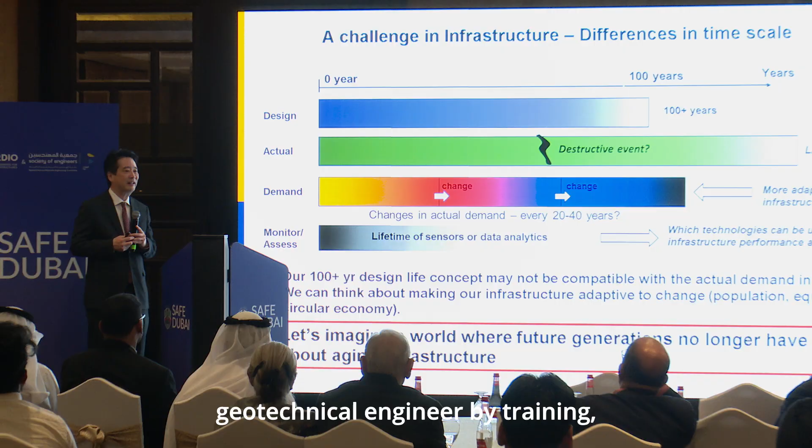So the talk of today is really about management, monitoring to management. So if you look at our infrastructure, as I'm a civil engineer, geotechnical engineer by training, we tend to design for 100 years, as you see over here. And then if you see the second column, if you're working in infrastructure, you want to prolong the life of infrastructure. Most of the projects I was involved in when I was at Cambridge University were in London, where we

have old infrastructure. Now I moved to the San Francisco Bay Area. We also have a lot of infrastructure, and we're struggling with those. I'm sure Dubai is expanding right now, but maybe in 50 years, 100 years, you may start to see those that we're working on. And we don't want you to see something that we're suffering. So what can we do better? And then we see a demand.

Dubai, when I came here 20 years ago, was totally different. And then I'm sure 20 years from now, it's going to be different. So the demand changes more rapidly than our design life, or actually the life of the infrastructure. So how can we make our infrastructure design not rigid, but more adaptive to change? So that allows us to think we've got to sense what we're doing, what the performance of our infrastructure is. And that leads to excitement in terms of sensors and data analytics that we see.

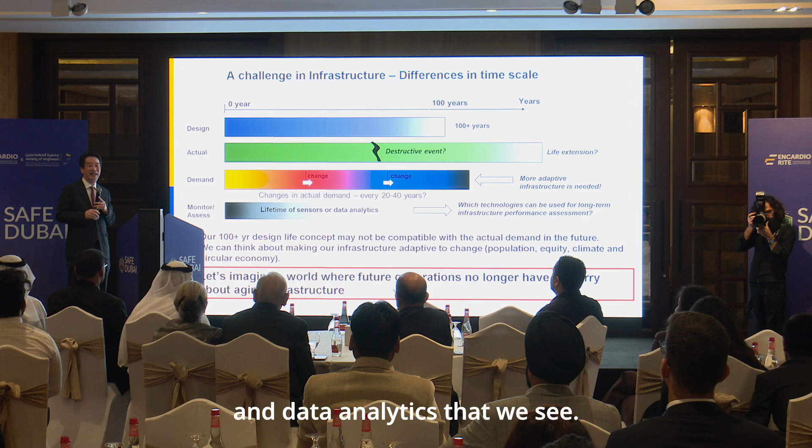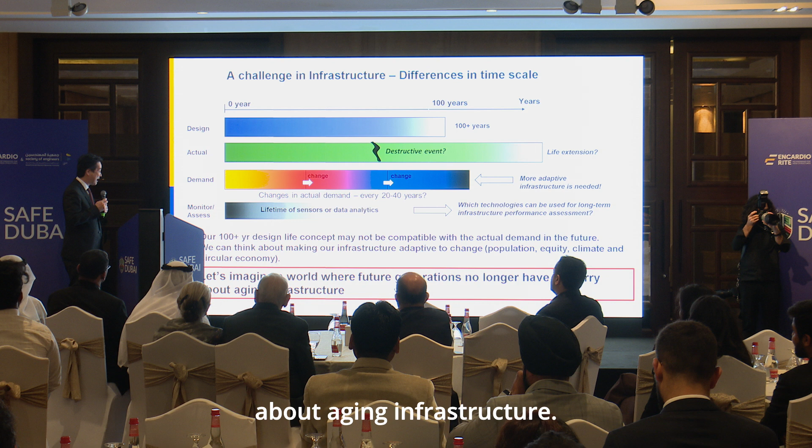But we want to make sure that these sensors, data analytics, will last for 20 years, 30 years, 50 years. What kind of technologies can we make sure are going to last for many years? So the point is that our 100 years design life may not be compatible with the actual demand in the future. We can think about our infrastructure as adaptive to change rather than rigid in terms of design and construction. So let's imagine a world where future generations like Ritvik and other colleagues do not have to worry about aging infrastructure. So that is the spirit that I want to give you today.

So first, excitement. Excitement is about the technology, emerging technologies. That's what we see over here in Dubai as well. This particular graph I made about 3 years ago, and I'm sure it's changing now, but vertical axis, expectation, horizontal axis, time, and there's always a hype that goes up to the peak, and you can see AI, machine learning, a little bit going down maybe, but then there's a peak, and it goes down to bring it to the market. You see LiDAR, wireless sensor networks, drones.

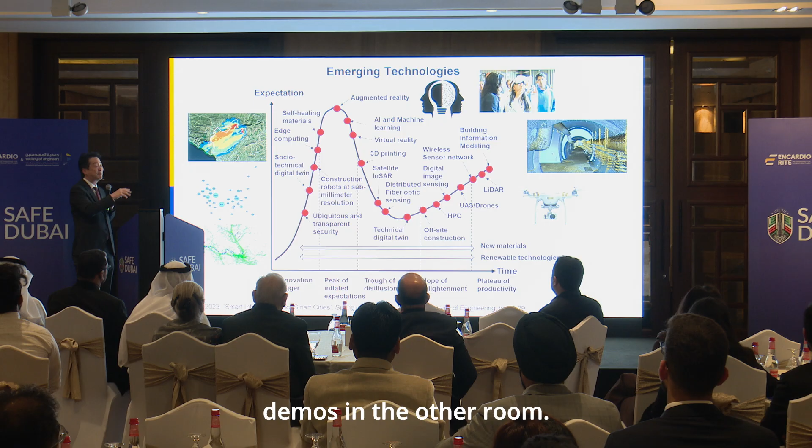I see some of the demos in the other room. You see this happening in real environment right now. You see technical digital twin coming in, and this is part of the theme I think we're going to have today, but also distributed fiber optic sensing, which I'm going to talk about a little bit more as well. And satellite systems. Sorry, it doesn't work here. And then you have machine learning.

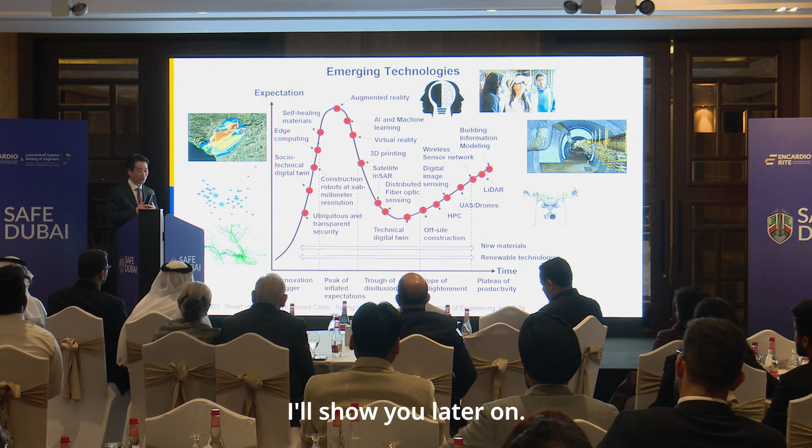And then the other thing I want to talk a little bit about is technical digital twin, but we call it socio-technical digital twin. How we bring social science into digital twin. And this is something I'll show you later on. Distributed means a lot of things. Distributed in space, from satellites, drones to sensors, and we go across different things. What excitement.

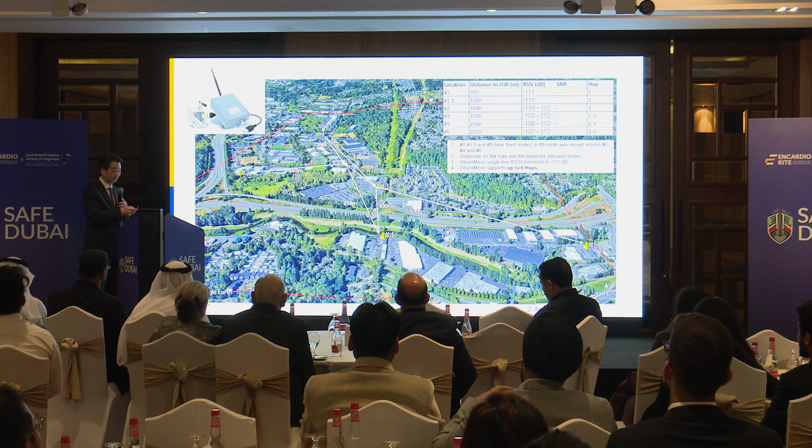This is one of the technologies 20 years ago, one of my PhD students spun out to create a wireless sensor company. And Amit said that he's using the sensors right now in Dubai, so I'm so happy to see that. What it allows you to do is you can monitor things. These are the nodes that can talk to each other and hop, hop, hop like what you do with your Wi-Fi at home mesh network, but on a really large scale. It allows you to move and distribute in time. You can measure in different time intervals.

For example, you can have a low data sampling rate, maybe one sample every hour. And then if you use these batteries, theoretically it can last for 20 to 25 years. So you just leave it and then you can monitor for 20 to 25 years. Because in most cases, it's not the device; the person changing the battery is the most expensive part.

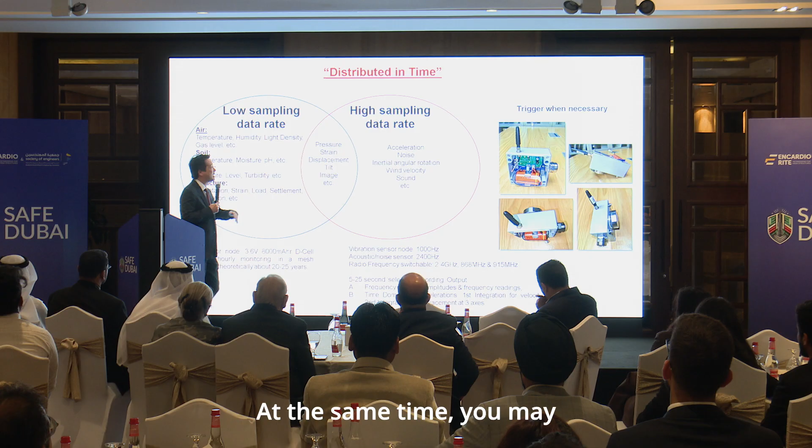At the same time, you may want to measure acceleration or some noise that has a high frequency. In that case, the battery cannot do very well. So you can start to think a little bit cleverly in terms of triggering when necessary. These are triggering devices that you see, and then you save energy. But the point is, for the past 20 years, we spent a lot of time asking how we can make it low power so that it can last for a long time. So that's exciting.

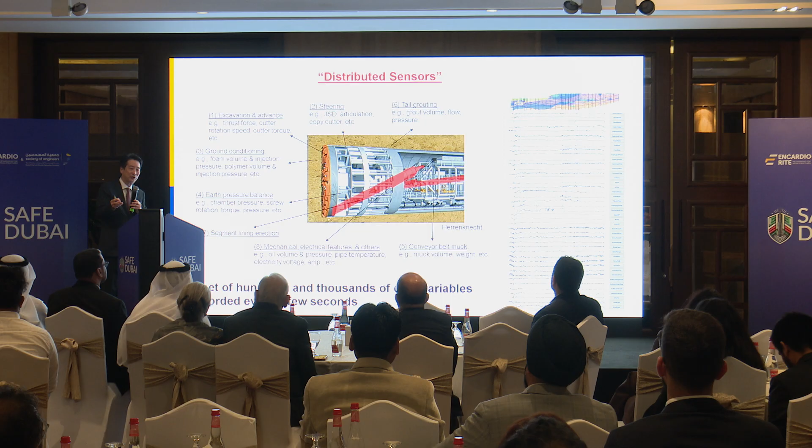And we can start using those to understand what's in front of you, like automated cars, which use LiDAR and visuals to find out where you want to go. But in tunneling, you cannot see in front, but you can use the information to see what ground it's excavating. At every borehole you have a ground truth, and as you move, you start to see what's the ground in between the boreholes.

And you can see the blue is clay soil, the orange is sandy soils, and this is what the AI or data analytics will tell us from 6,000 data sets as you learn along here. The one over the top shows what the engineering geologist tried to interpolate between the boreholes. And what you see is such a nice correspondence.

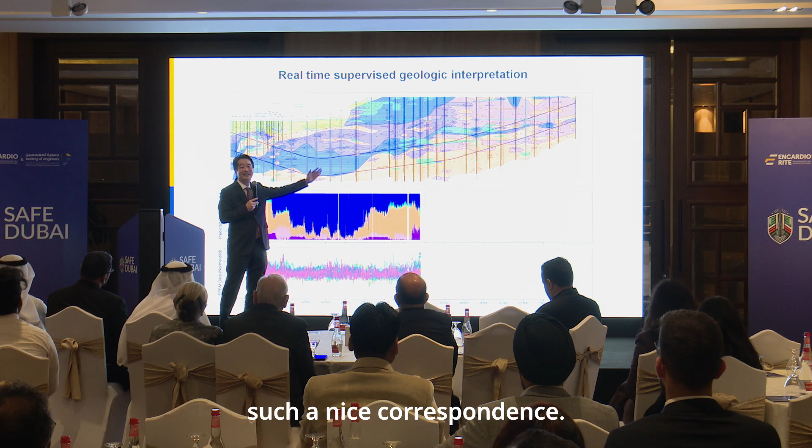If you look at the details, for example, you can see some pockets of different soils in green or purple, and you can actually see that through the machine learning technique, through the 6,000 data sets. So that's exciting as well.

So at UC Berkeley, we have a Center for Smart Infrastructure. It's really about partnership with infrastructure owners, academia, industry, and regulators to address the most pressing challenges like aging infrastructure, climate change, water supply, natural resources, and emergency and community preparedness. Especially in the Bay Area, we have earthquakes and wildfires, which I'll show you more later on.

But the vision is to provide innovative solutions to realize adaptive systems with intelligence for life, making sure that we monitor our infrastructure until it is reused, for example. So we work together with many infrastructure owners, because they tend to have a very long-term view, and therefore, if we work together, we will make it happen.

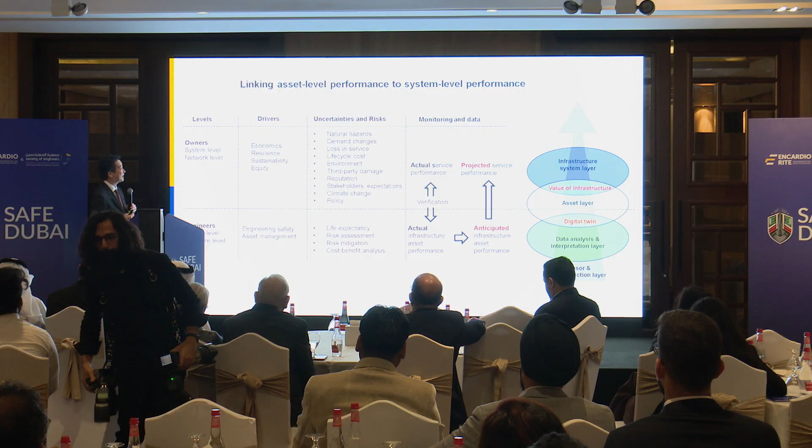One thing we also want to do is look at how data is used to interpret your asset through the digital twin, and really the value of infrastructure. And we have to appreciate, and this is where I work with many general managers of infrastructure owners, what are they thinking about? What are their drivers for economics, resilience, sustainability, equity, for example? And there are a lot of uncertainties, like reputation, policy, and stakeholders' expectations.

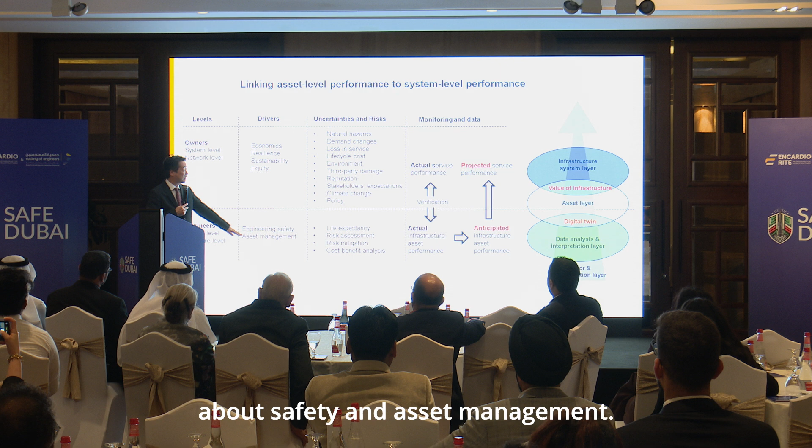Engineers like me are really looking at the asset level: safety and asset management, life expectancy, risk assessment, risk mitigation, and cost-benefit analysis. Our job is really to link this through monitoring. But monitoring is not just to see what's going on right now. What we want is to predict what's going to happen in the future, which gives a projected service performance and allows infrastructure owners to cope with sudden things they never thought of, so they're ready to act.

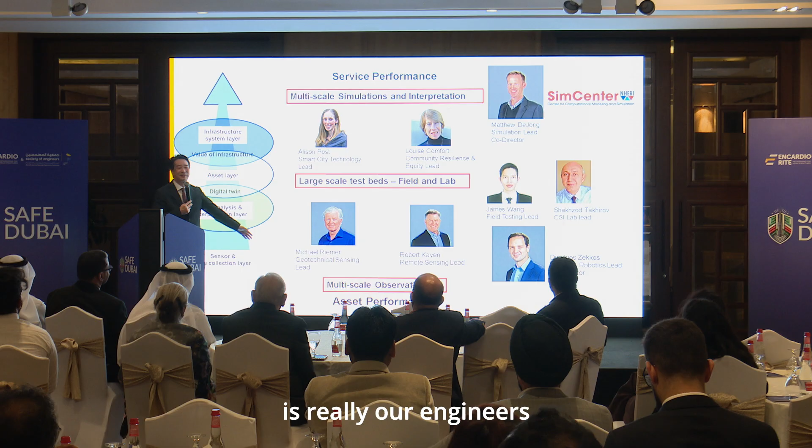So at UC Berkeley, we have a lot of people working on it. At the service performance level, we have the Sim Center, a simulation center, which I'll show you a little more later on. My colleagues on the top are social scientists, whereas on the bottom are our engineers looking at assets, all linked together through large-scale test beds, showcasing that we can do it.

And hopefully what we want to do is to have this circular economy. That infrastructure is built, you operate, hopefully extend the life. And that's what we want to do. We want to live longer. But then think about rebuild and how can we use this data to make this happen.

So what I'm trying to do next is to give you some examples. So this is just a vision, and what I'm going to show you is some of the examples. Smart construction. I'm happy to see a lot of things happening as a geotechnical engineer. It's a dream to be here in Dubai. A lot of piling, foundation, and all these things.

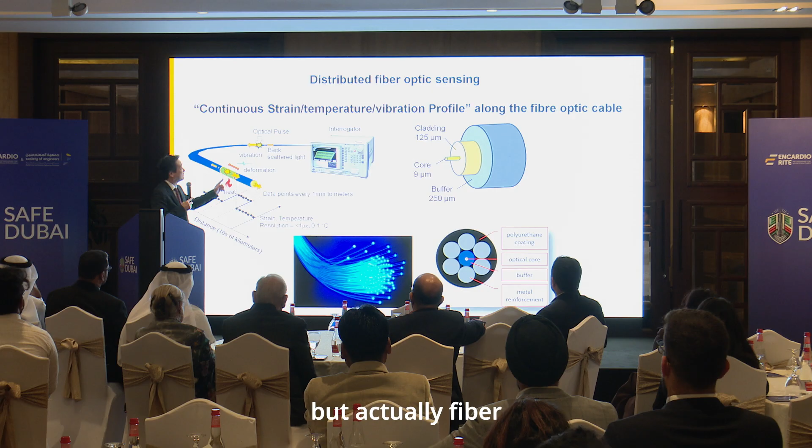And one of the technologies that we've been using for the past 20 years is what we call distributed fiber optic sensing. It's a fiber optics. Maybe some of you have heard of it. Fiber optics, mostly used for telecommunication, for fiber optics communication, but actually fiber optic can become a sensor. You shoot a light, and then every point, a small light comes back.

And if you analyze that small light coming back at different locations, I can get what is the temperature at that point, what is the strain at that point, what is the vibration happening at that time, at every point along the fiber for tens of kilometers. So think about using this as a sensor for monitoring infrastructure. And this is called distributed fiber optic sensing.

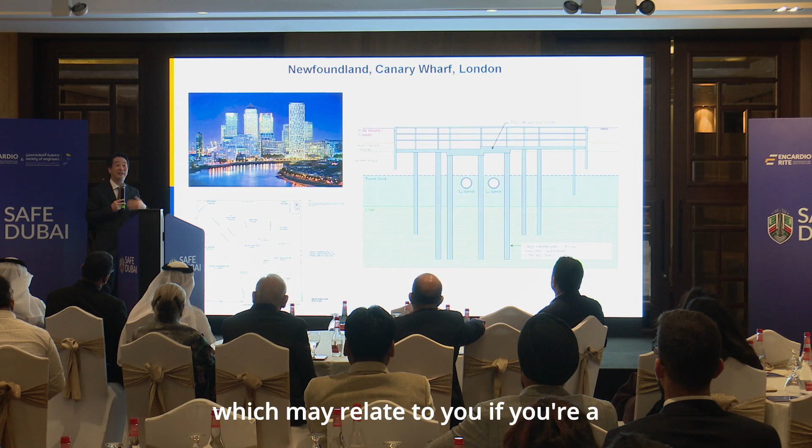So I'm going to give you one example as a geotechnical engineer which may relate to you if you're a geotechnical engineer. This is a project in London, in Canary Wharf. There are buildings, as you can see, it's one of the financial districts in London. There are not many high-rise buildings like what you have over here in Dubai, but there are a lot of issues on ground. So typically here, you have a London Underground tunnel, old infrastructure, with the new piling going nearby.

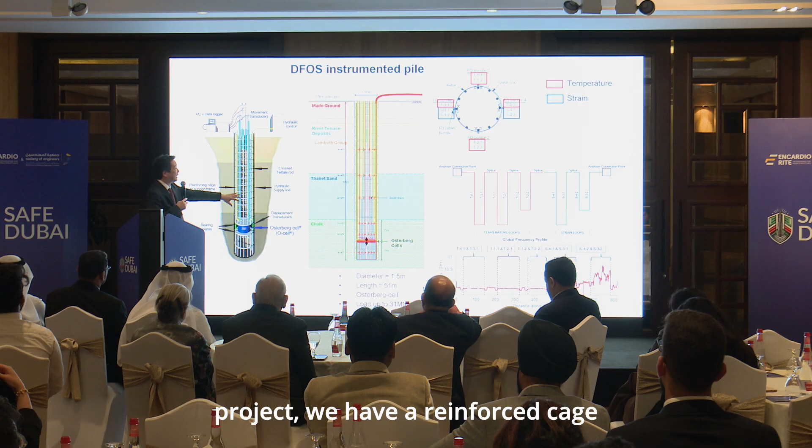So it's very important to understand what is the pile-soil interaction. And this is a pile of about 50 meters or so, and I'm sure in here you have that kind of shaft and piles, large diameter piles. So in this particular project, we have a reinforced cage where we attach the optical fiber during construction. There are two cables attached. One is a strain cable, and the other is a temperature cable.

And we attach the cable at different locations on the cage, so the cable goes in and out to the surface, goes to a different location, goes to the pile, and comes up at different locations of the pile in terms of temperature and strain. And the cables are connected together, and once you have this interrogator, I can get the temperature and strain at the same time during the loading.

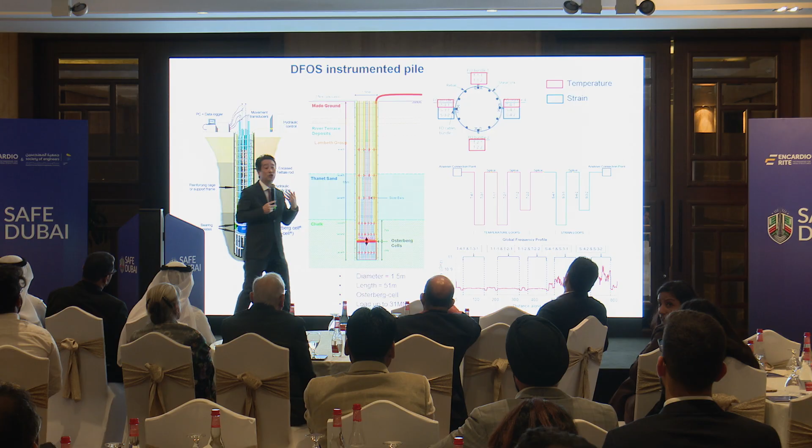So this is the pile load test, the bidirectional loading test, or we call it O-cells, that we measure. We have an expert here. We have an O-cell that pushes the pile upwards but pushes downwards. It's a self-reacting device, which is so good because if you just apply a load from the top, you need to have a huge reaction, whereas this is self-reaction. But it allows us to understand what is the shaft friction, meaning the friction between the pile and the soil, and then what is the end bearing of the pile.

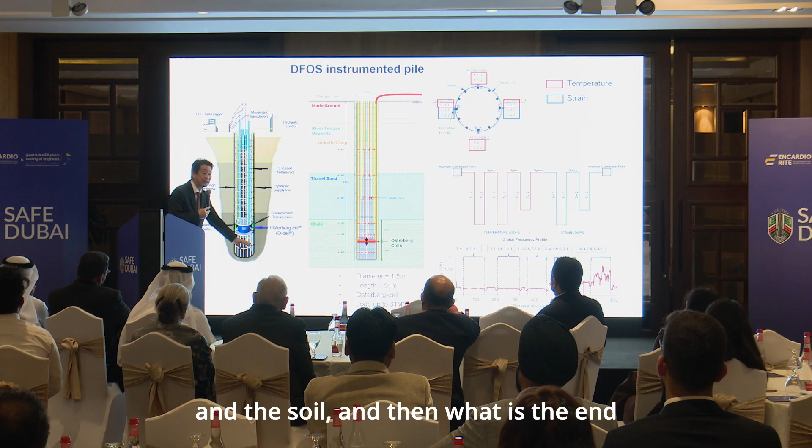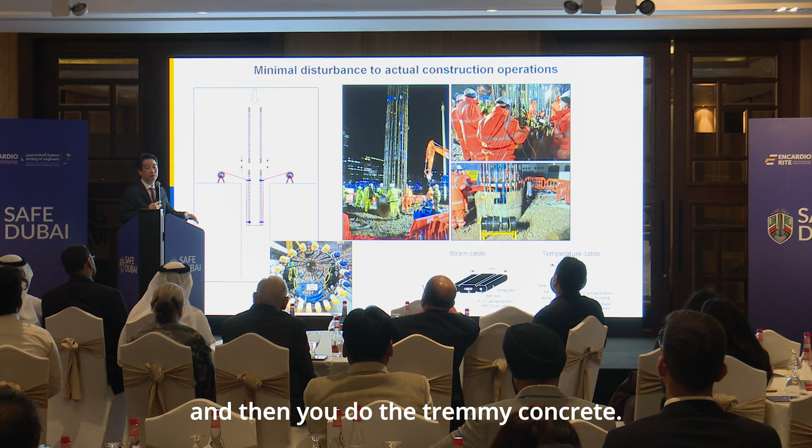It is important to make sure that these are installed in a good way, but also don't disturb the construction process. So this one, you can see the drum of cables that goes in as the cage goes down. Our contractors just attach the cable, hook it up, and then as it goes down and when cages are spliced, you hook it up. And at the end, you pull it a little bit, and then you do the tremie concreting.

One thing that we always worry about is how the concrete is flowing when you do the concreting. So sometimes if the concrete doesn't flow well in the ground, you may have some pockets without concrete. So what we tend to do is what we call a thermal integrity test. Because the cable can measure temperature, I can see how the temperature is changing during the curing of the pile.

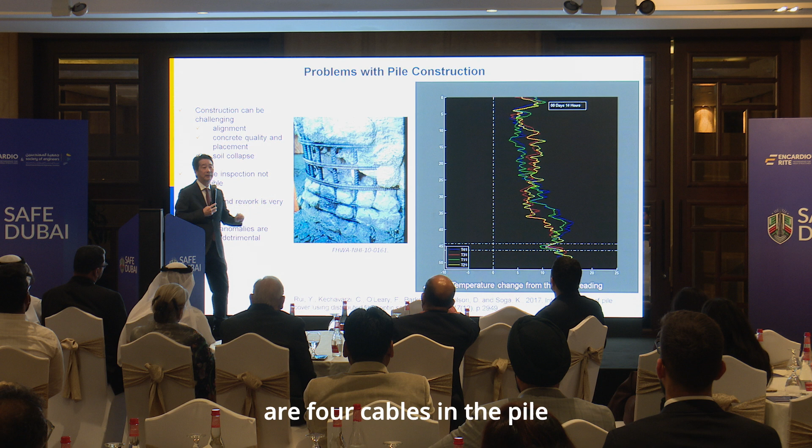And this one shows there are 4 cables in the pile at 4 different locations, 90 degrees apart. And you can see that they're curing in a different way. As you can see, the blue and green are on one side, and the red and yellow are on the other side, meaning that curing is not happening uniformly.

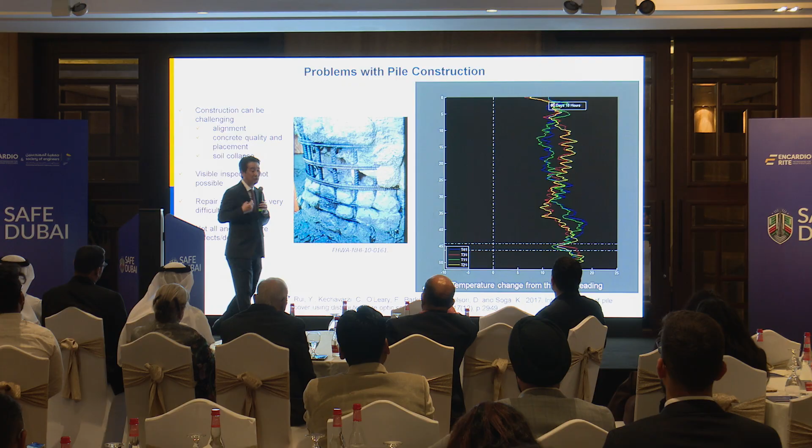Also what you see, I'm going to do it again, is this sort of randomness in the data, but also ups and downs in the data, in a sense that every 3 meters or so, there's something going on in terms of temperature variation during the curing. But what we can use is how the heat is dissipating into the ground, and this is called thermal integrity testing. Based on that, I can try to get a shape of the pile.

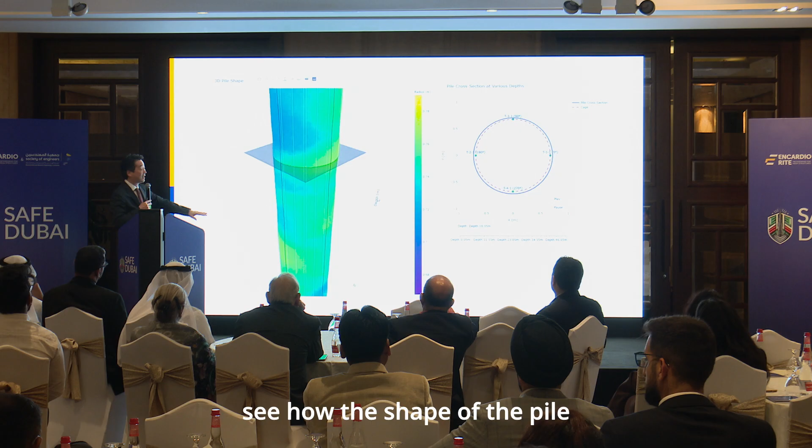So by looking at the temperature change with time and doing some analysis, I can get a shape of the pile. And this is called thermal integrity test. So this is the shape of the pile of this particular case. And then what you can do is that you can start to go to a deeper one and just see how the shape of the pile looks like, just from measuring the temperature change. And you can say, wow, it looks good, maybe thin over here, thick over here. It's not a big variation, but you can see how it's performing.

Now you look at the pile, and now you apply a load. So you can apply a load. And now you're applying a load at the bottom. Your strain will be the largest at the bottom and then decreases as it goes to the top because you have friction happening between the soil and the pile. And then this particular gradient is related to shaft friction.

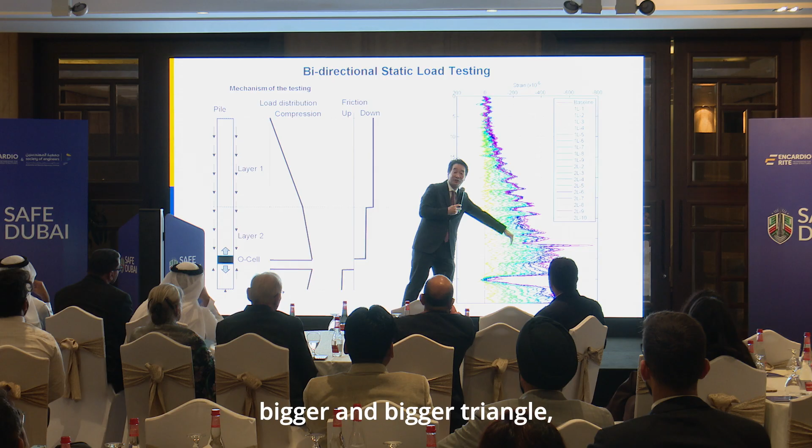And what you see over here is that as you increase the load, this triangular distribution becomes bigger and bigger. The triangle will become bigger, meaning that the gradient is higher, meaning that there's more friction. So when you look at this particular data, it looks like a triangular distribution, but it goes up and down. Do you like this data? Oh, that's good, because many designers say, I want this, not that.

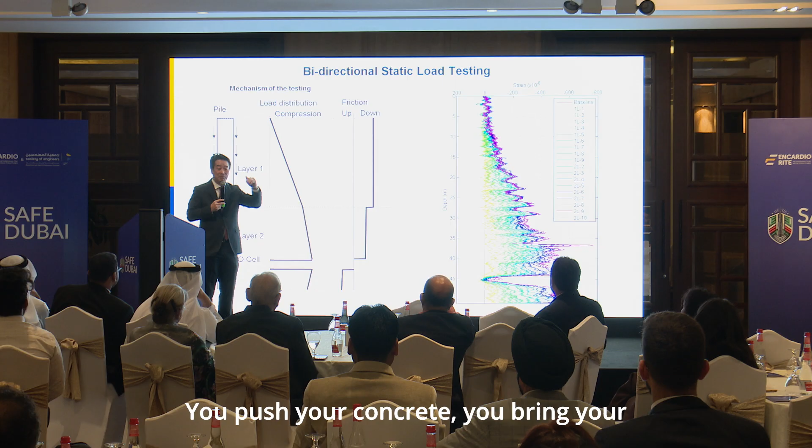But the point is that the data is not just one data point over here and one over here. It's lots of data creating the shape. And there's a lot of analysis we can do, but the point is that it's about a 3 meter interval. That is related to how you do the concrete. You push your concrete, you bring your tube up 3 meters, and then you push it again. There's an interesting cross-section process that you can do.

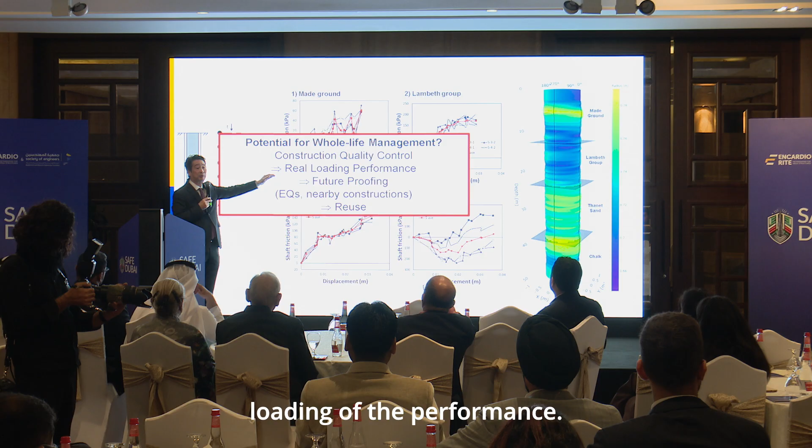But then with these data sets, you can do a finite element analysis to get how the shaft friction is developing with load. And these are called TZ relationships that we use in design. So you can derive the TZ relationship based on that. So this is the excitement: with fiber optics, you can measure the real performance as part of the construction control. You can see the real loading performance, and also future proofing.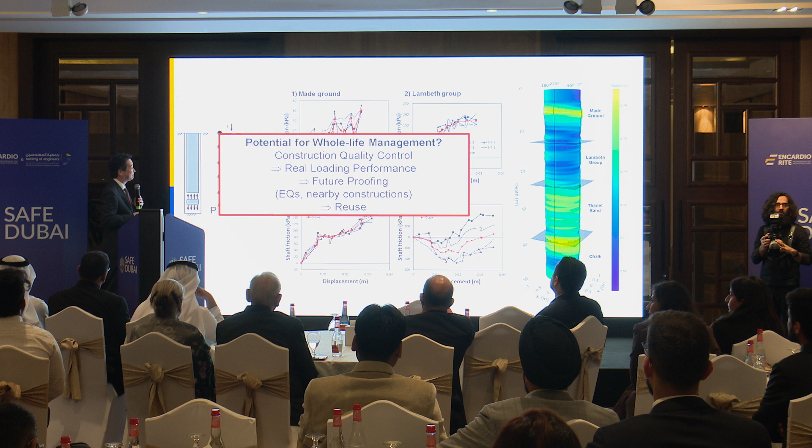Perhaps there will be a new construction nearby in the future. You have fiber optics already in your pile. So just hook it up, and then you see actually how the pile is performing. And once you know the real performance, maybe you can reuse the pile. And that's something that many people in geotechnical engineering have been thinking about. And as a developer, that will become a very important part of the asset. The foundation becomes an asset for future development. So that's just one of the examples of the excitement. Smart operation.

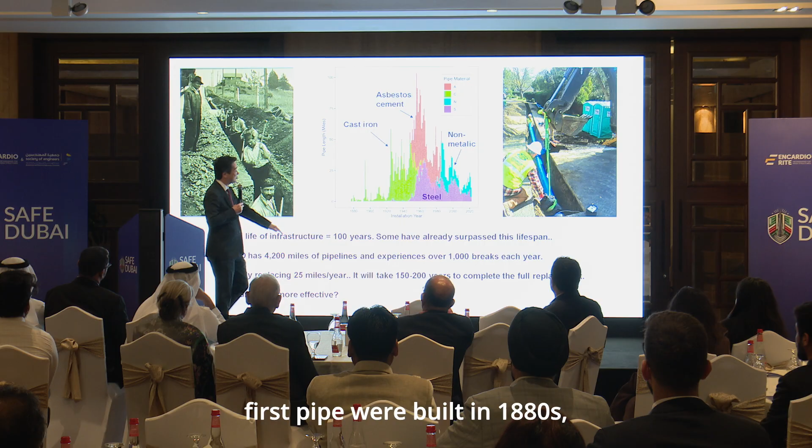This is the history, and you can see that the first pipes were built in the 1880s, 150 years ago. They used cast iron. Around World War II, after World War II, they decided to use asbestos cement pipe. And then after that, people started using steel pipe, and corrosion becomes an issue sometimes. And then you have non-metallic ones.

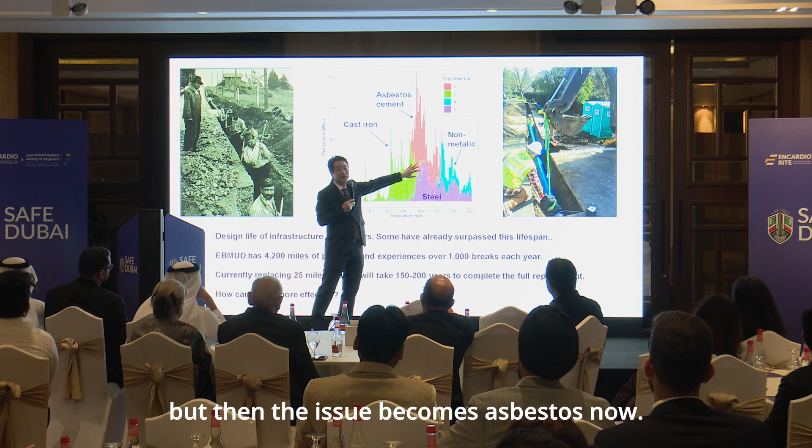The point here is that even with a 100-year design life, we tend to make decisions changing how we're going to use different materials. So that's a problem. We've been really focusing on cast iron, but now the issue becomes asbestos. We start to see some asbestos pipe, which is a very big issue because once it's exposed to the air, asbestos becomes particulate and a health issue. So we're thinking how we can rehabilitate these. But the point is that this infrastructure has a 100-year design life.

This particular company called East Bay Municipal Utility District, we call it East Bay MUD, has about 4,200 miles of pipelines. It goes from San Francisco to Chicago and back. That's the length of pipe they have. They replace about 25 miles, 40 kilometers, per year. Just thinking about the cycle, it's going to take 150 to 200 years. So it's beyond that 100-year design life. So how can we do better?

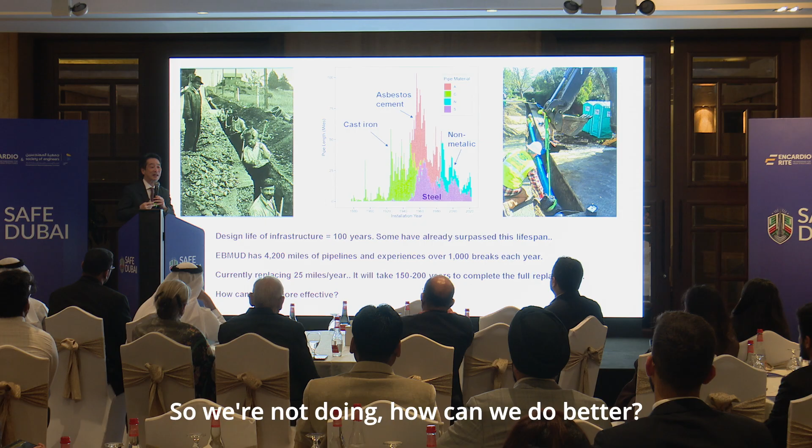So we look at these, and then we look at each pipeline and see what kind of strain. If I know the movements, I can back-calculate what kind of strain these pipes will experience, both in axial and bending.

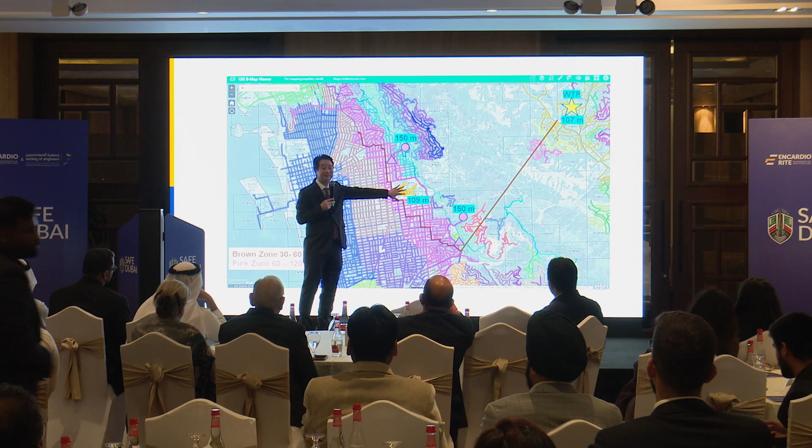This is the picture of the pipeline in our area. If you come to our campus, this is our campus. Our campus is in what we call the pink zone. And actually, this is a hill, the Berkeley hill. From the bay, it goes up the hill and to the other side. We have a water treatment plant on the other side of the hill, at an elevation of 107 meters. Our campus is at 109 meters.

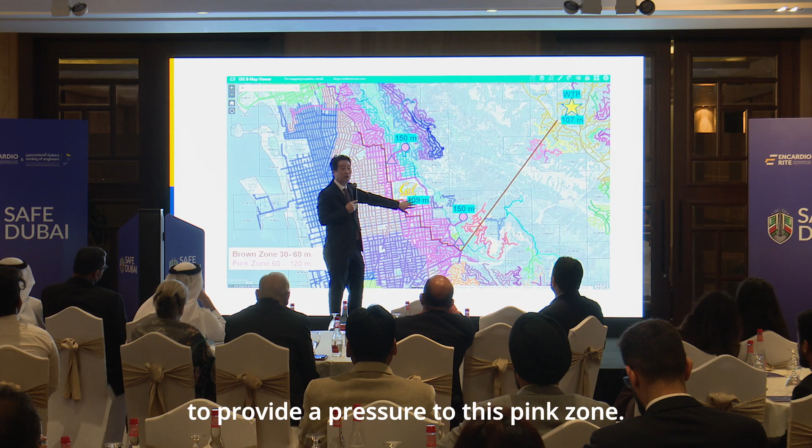So in order to have enough pressure, every day water goes through the tunnel and up to these two water reservoirs, tanks. That gives enough pressure, 150 meters, to supply this pink zone. And unfortunately, our fault goes right across here. So if an earthquake happens, we have a risk.

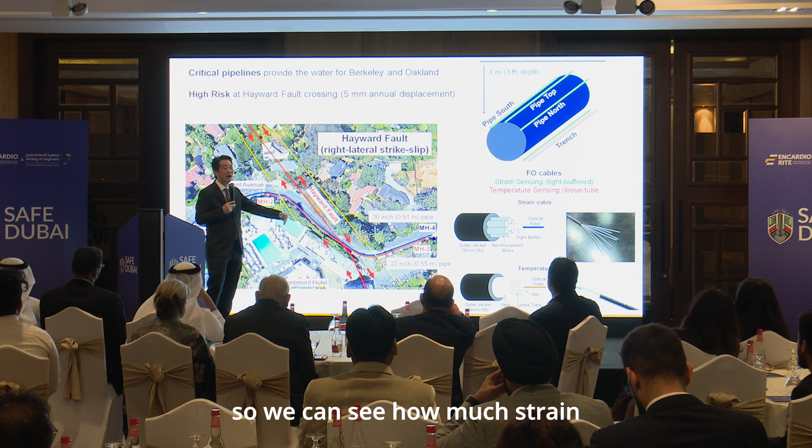So here we put fiber optics. This is a new pipeline crossing the Hayward fault, and we attach the optical fiber, like what you see over here. Some are in the trench, some are on the pipeline. You directly attach it to see how these pipes are behaving. And actually, this fault is creeping with time, so we can see how much strain is developing on these pipes.

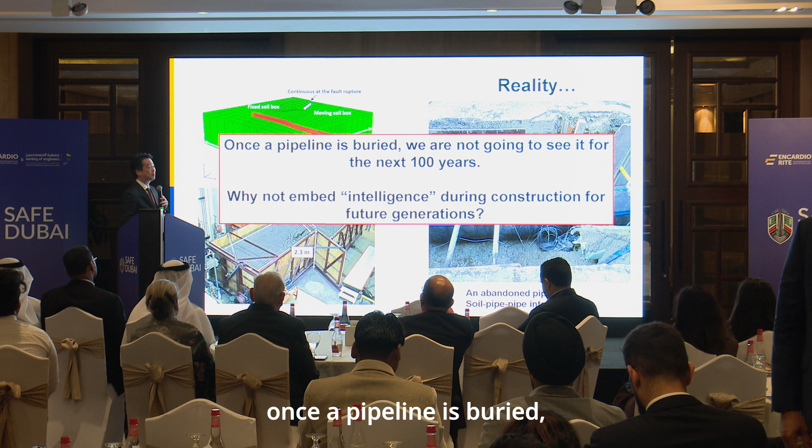So the point here is that once a pipeline is buried, we're not going to see it for the next 100 years. The picture you see, you're probably not going to see again. So why not embed intelligence during construction for future generations?

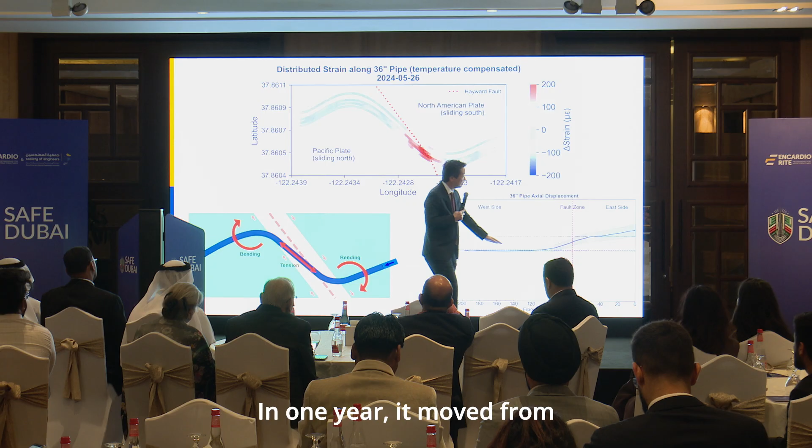In 1 year, it moved from one side to the other side about 4 millimeters. So 150 meters of pipe, I can see the little bit of elongation of 4 millimeters using this technology. So it's very sensitive, and you can start to see, like measuring your heartbeat, what's going on in this infrastructure.

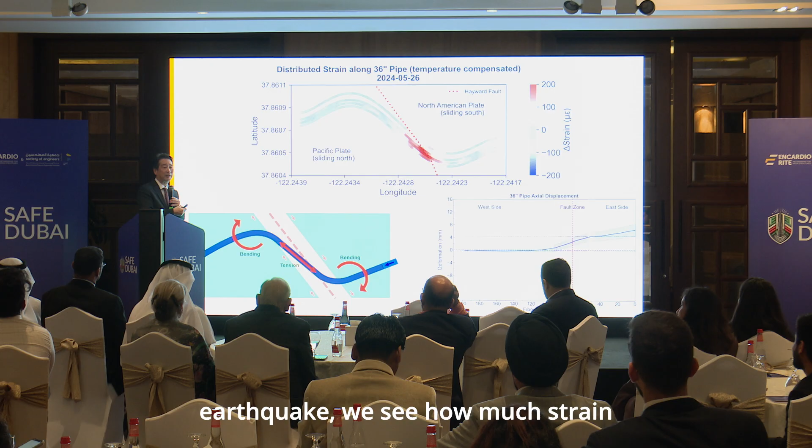The point here is that an earthquake is going to happen, and we design the pipeline to withstand sort of 30 centimeters movement. We believe that pipe will be okay, but then after an earthquake, we see how much strain it affected, and that gives us what we call residual strain, so we can say, when shall we replace the pipe? So that is a very important assessment to do.

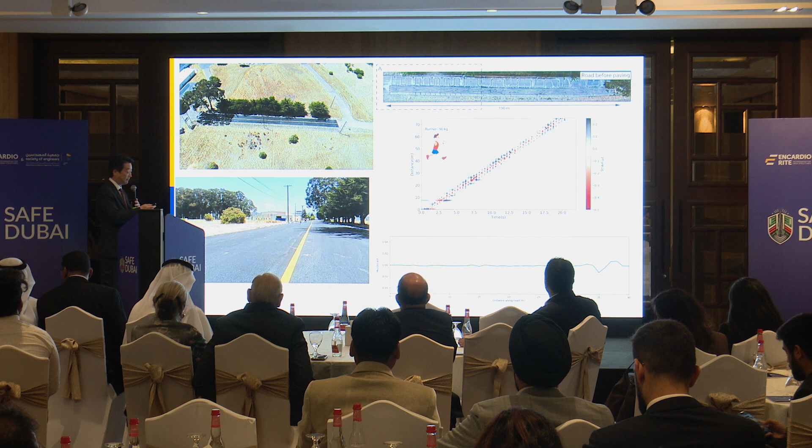Then you can start attaching these fibers. Your fiber is already in the road, for example, for telecommunication. You can attach the fiber on the pipeline. And then what you can start to do is start listening, because the fiber becomes a microphone as well. So this is just an experiment. We were having a fun experiment in the actual pipeline. We start to create a fictitious leak.

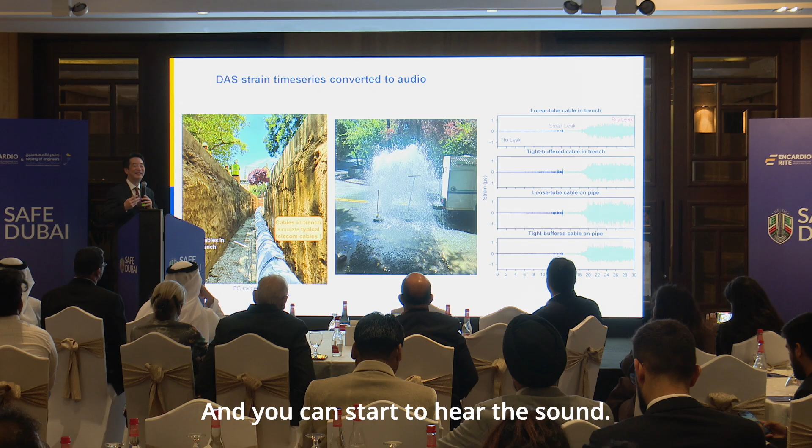And I think you're going to hear a sound. So no leak yet. And then we start to open up the tap to make it leak a little bit. And you can start to hear the sound. This is measured by fiber optics. Obviously, the big one, you know, it's a big one already. But the idea is, can we detect it before this happens through listening? Fiber optic can become your microphone now.

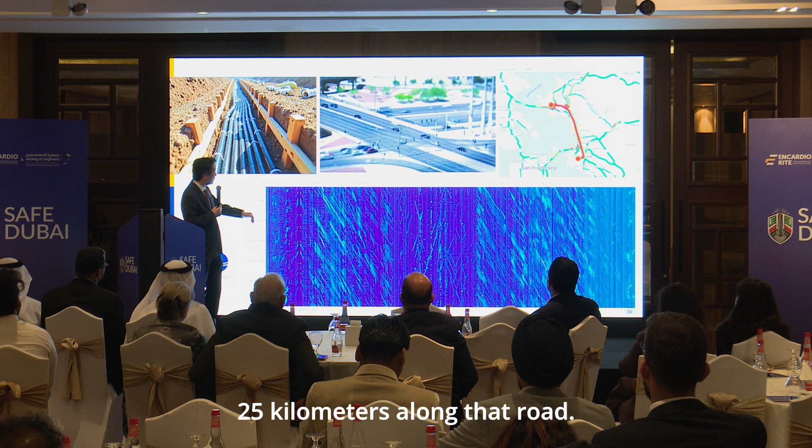You can have a fiber optic. You already have fiber optics along your street. It's called dark fiber, used for telecommunication. So you can borrow one of them. And here's one of the works that we're doing from the city of Richmond to Oakland through this particular road, which is about 25 kilometers. So from Richmond all the way to Oakland, 25 kilometers along that road, and this is minute-by-minute movement of what's happening on that particular road.

And you see the lines, and this line corresponds to a car moving on that road. So you can see a car started from this location, it moved with time in this direction, the gradient is the speed of the car. You can see some stopped, so no movement, and then start again. So you can see the activities of the road, and we're working with Caltrans, California Transportation. Can we detect heavy truckloads, EV cars? Can we detect people moving, road safety, and can we detect leakage of the pipelines?

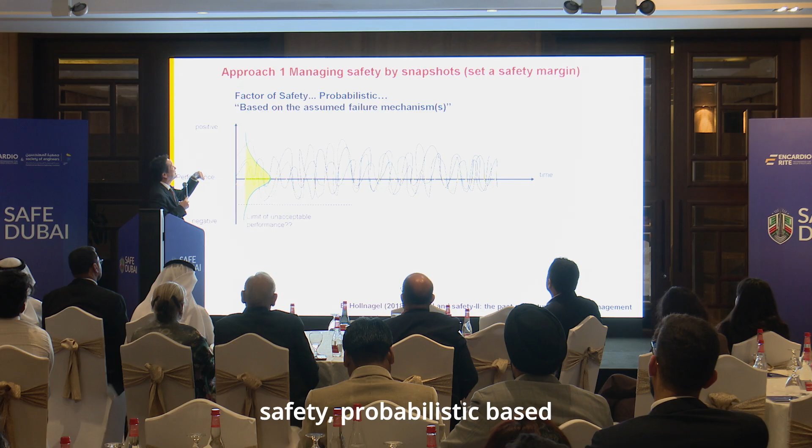So in the past, engineering design is about we sort of know the performance of our infrastructure with time from our experience. We say, okay, this is statistical, and we may show the limit of unacceptable, factor of safety, probabilistic, based on assumed failure mechanisms. And then if some accident happens, we say, wow, that's something I didn't think about. So you recalibrate your probability to give a different factor of safety.

You may have surprises. You may have another accident and say, okay, I have to think about a different mechanism, and you update your design. And this is called approach 1, managing safety by snapshot, setting a safety margin. And actually this particular concept comes from psychology.

Professor Hollnagel from Denmark is a psychologist. He's looking at how to run hospitals. And hospitals don't just use factor of safety. They monitor how the doctors are working, how the caretakers are working, to how the patients are doing in real time, so that you can be more proactive.

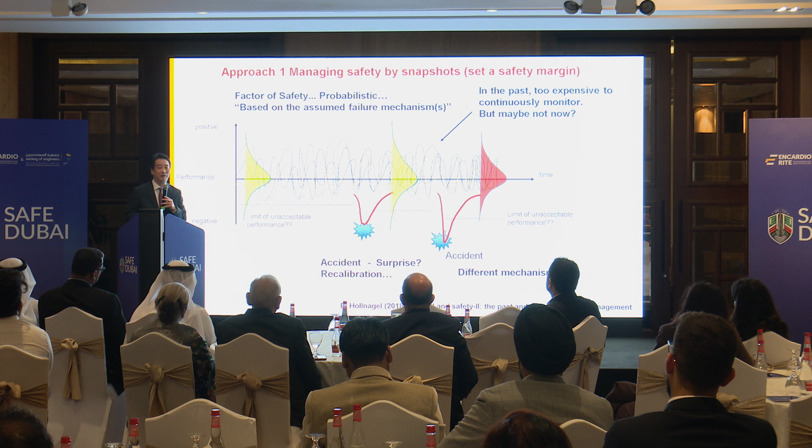So the point is that in infrastructure we tend to be like this, but in the past it was too expensive to monitor, but I think with this technology we can do it. So this is called approach 2, managing safety by everyday work, real-time monitoring. You monitor, you learn, anticipate, and respond. So this is what you can do.

You can monitor. So if you monitor, you can prevent the accident from happening because you're more proactive. If you know the actual performance, you can learn how to respond quickly if an event begins to unfold. You manage future unknown demand by reducing the uncertainties. Perhaps there's some weather change happening in the past 20 years or so, which was not considered during the design stage.

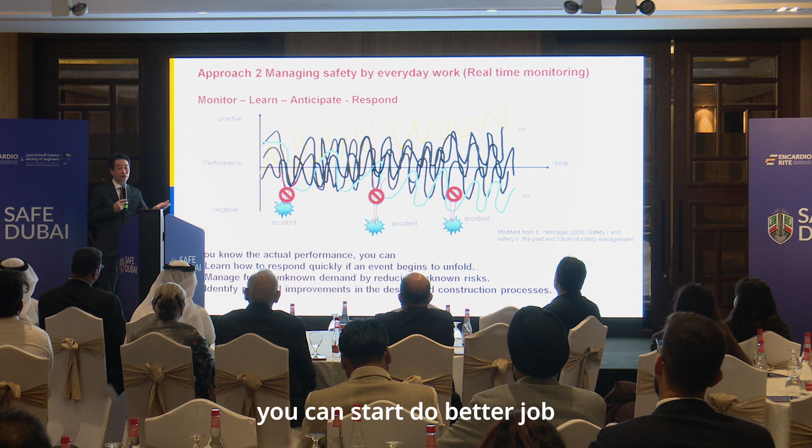And then you identify potential improvements in the design and construction process. You can learn something, like the one that I showed you, the pile geometry and how shaft is developing. You start to learn, and you can start to do a better job in your design because you know the actual performance. And it can lead to circular economy, really about reusing the piles or reusing the components of our infrastructure, because you know the actual performance of the infrastructure you're dealing with.

Obviously, that's what data and AI and machine learning is, and you're going to see a lot of things probably from Rite and the others about the value there. But the point is that many of the AI just look at the average. What we want to do is really look at the tail ends, because as engineers, we're trained to look at what if it happens this way, how do we respond? So that's where learning, anticipating, responding will come as a value. So sound engineering judgment leading to the right choice and decision through the monitoring is what we want to train our young engineers in.

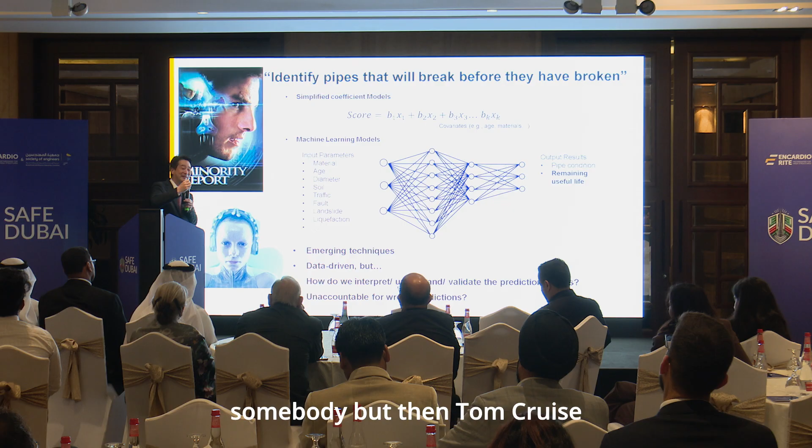AI is exciting. My generation, I remember Minority Report. Some of you remember Minority Report? The movie is still a movie. It's about finding the crime before the crime happens. So Tom Cruise comes, and somebody wanted to stab somebody, but Tom Cruise catches the person who's trying to stab before the crime happens. So we want to do that for infrastructure. We want to fix the infrastructure just before it breaks. We don't want to replace it when it's very, very nice.

So how can we predict the lifetime of our infrastructure? Typically in our mind, we tend to look at it linearly: what is the age of the pipe, what is the material of the pipe, and we put weights. Because it's easy to look at, and this is how we understand, and many of us work on this. The great thing about AI and machine learning is, like your mind as an expert, it thinks differently in many ways, going back and forth. And that is the strength of AI. It's an emerging technology, but how do we interpret it, because it may become a black box.

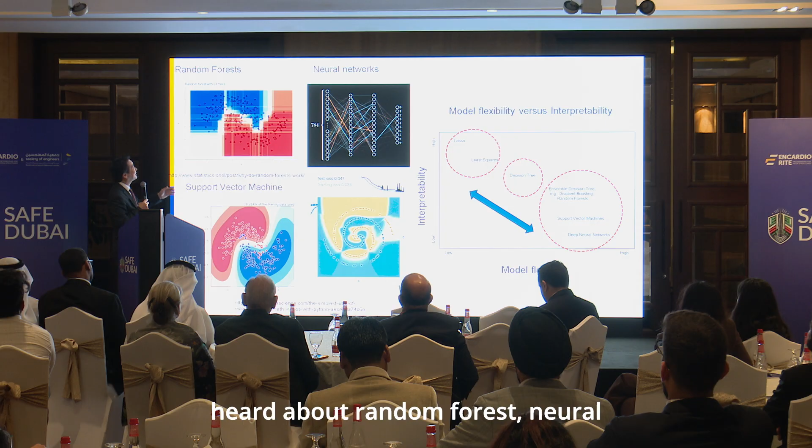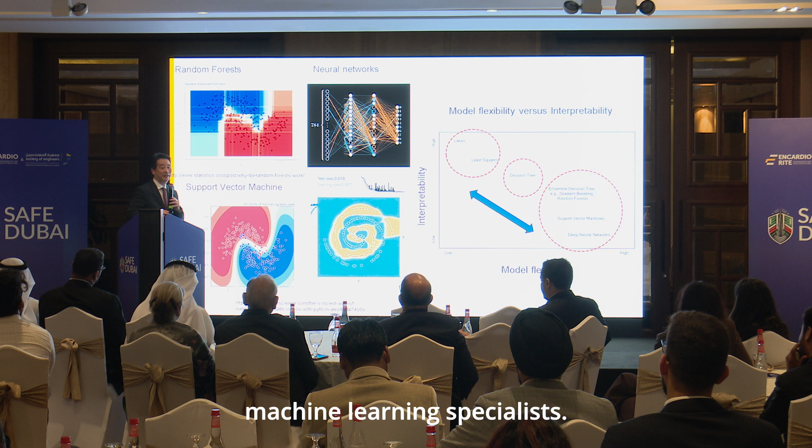You may have heard about random forest, neural networks, support vector machine, and all these things, and it may confuse you, and many of us are confused because people use one technology and say, I'm good at that. Many infrastructure owners are coming to us and saying, I really want to know what they are talking about. So we're opening up the machine learning tools to figure out how you can make it better. This is where we want to make sure that we guide our AI and machine learning specialists, because we're not interested in just the average problem, we're interested in the tail ends.

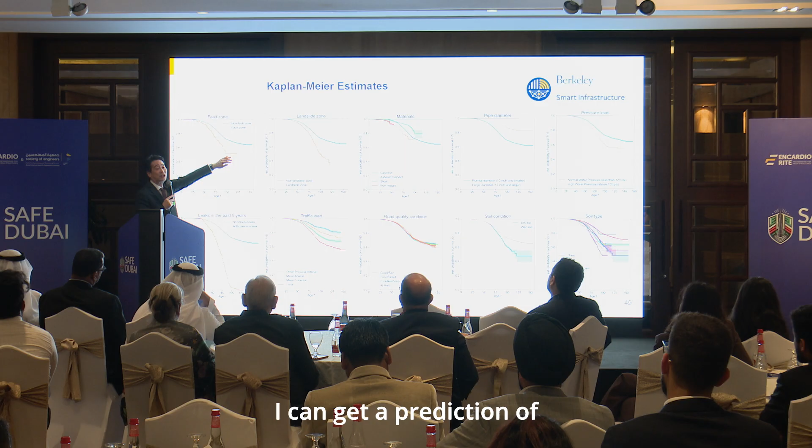So just looking at that pipeline I showed you from East Bay MUD, I showed you 1,000 breaks every year. And we have lots of data for 30 years. If you have a lot of these pipelines, and say one set of pipelines is in a landslide or fault zone and another is not in the fault zone, if I split the two categories, I can clearly see the probability of failure with time in the fault zone, 50 years, 100 years, 150 years, because we have data up to 150 years, and I can get a prediction of how they're going to break.

And then if it's not on the fault zone, it's less likely to break. If you're on the landslide, also I can see the difference. If the materials, I can see the difference. But the point is that I can separate you two, and you have certain categories, but every individual of you are different. So they're all combined together, and then I want you to be your pipeline and want to make sure how long you're going to last.

That's something we want to know myself. I want to know how long I'm going to last. Maybe I don't want to know, but then that's the point.

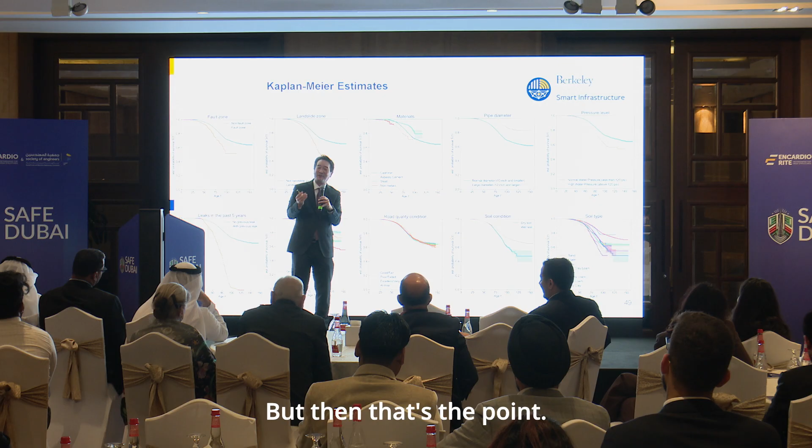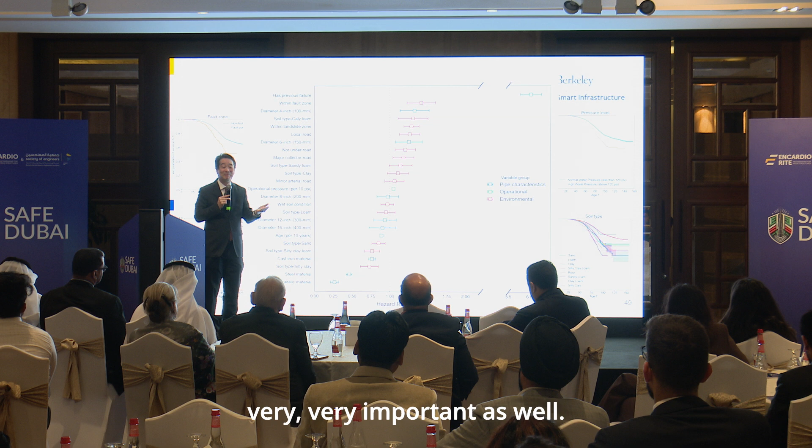And you can start to do some analysis to say, what is the most important part in terms of machine learning, tells you the issues on how fast it's going to degrade. Obviously, the top one has previous failure. If we go to hospital more, it means that you're not really good. So the point is that we tend to repair pipeline, more repair, you get more of that. That is big. Within the fault zone, for us, is very big. Diameter of 4-inch is very, very important as well. So you start to see some engineering through this technology.

And you can do all these fancy stuff. This one is called left truncated right censored tree based on conditional inference tree, LTRCIT. I'm not sure you understand. The only thing I can say to you is that left truncation means that I only have 30 years worth of data from 1990s to 2020. I don't have data before that. So I have to extrapolate the data historically backwards, and that is a left truncation, but at the same time I have to extrapolate in the future as well. So there's a technology in AI how to treat that particular problem.

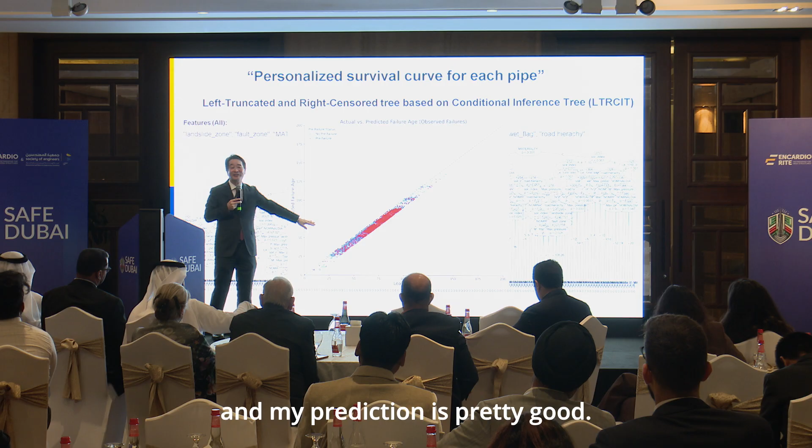And many of the AI companies will say, my leakage rate and my prediction is pretty good. But that is something that you maybe get the answer, but what you really want to know is what's going on behind that particular model. Just to give you a little bit of a hint of this 30 years, 1880s is where we started to put the pipe in the Bay Area. We only have data from the 1990s. We need to extrapolate backwards, and then we have to predict further.

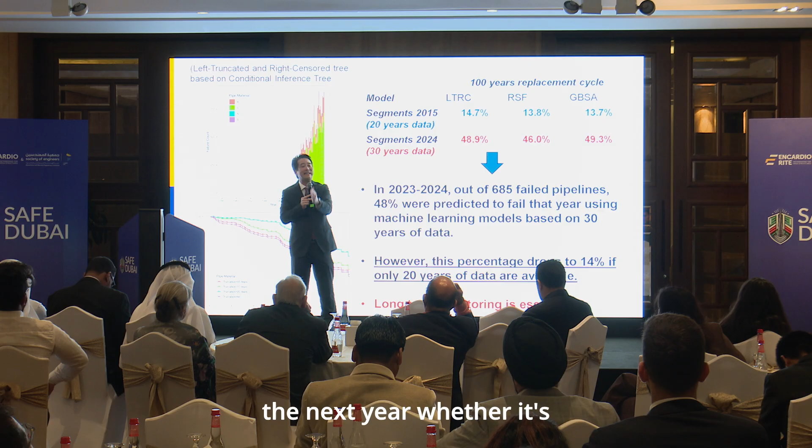We can start looking at the data. We have 30 years, but let's say if we only have 20 years of data, what's the value? If we have 30 years of data, what's the value? If I only have 20 years, these are different models. Sorry, it's just numbers, but it shows you, if I only have 20 years data, we look at 20 years worth of data and try to predict the next year whether it's going to break or not. So we have 20 years data, and then we predict what's going to happen in the next year.

And then there were 685 pipes that broke that particular year. And if I have 30 years worth of data, I can predict about 50% that it's going to break. In other words, out of 685, about 350, I could say, okay, let's replace it before it breaks. But it's still 50%. Whether you like it or not, that is the truth. If I only, yes. Sure.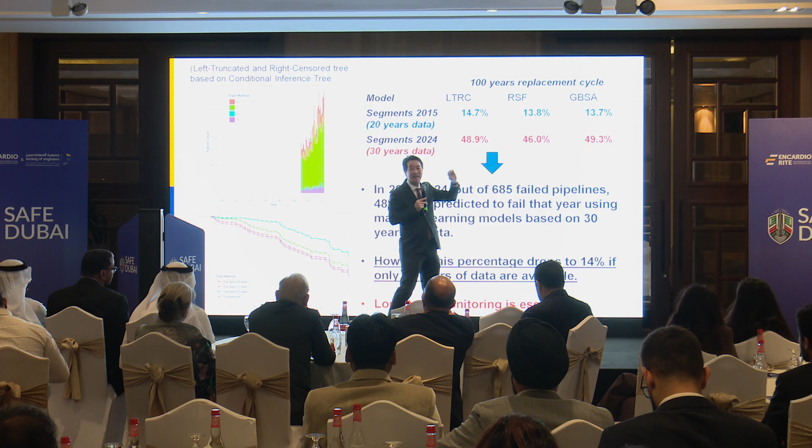It's very interesting. That's why I'm asking this question. You have 30 years data. So if you only use the present 10 years data, can you predict the previous 20 years data and tally it with that? Yes. So if I use 30 years data, I can predict next year 50% of those, to be fair. If I have 20 years worth of data only, I could only get 14%. So 20 years worth of data versus 30 years data make this difference.

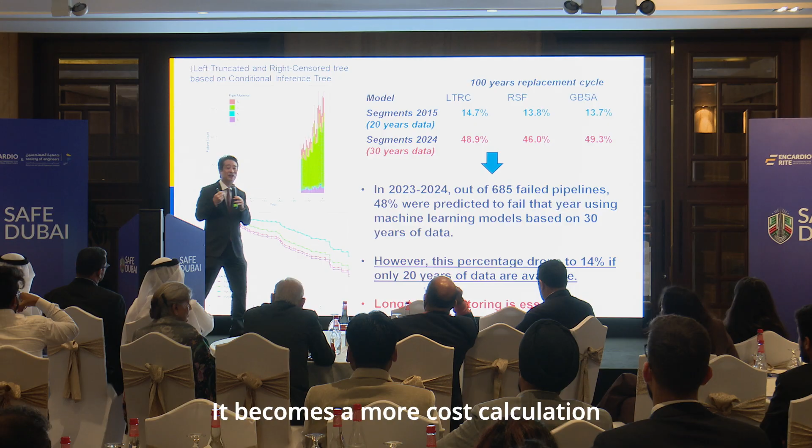So the point here is that long-term monitoring is essential. At least this case shows that I need 30 years to have 50% right, 50-50. But that makes a big difference. If I have 685 pipes and I know they're going to break next year, 50% of these, I can proactively change that pipe and save that particular one. So it becomes more of a cost calculation, how this prediction can be made. So the point is that long-term monitoring is essential. Every case is different, but at least I'll show you how we can do this in pipeline systems. And this is what we tend to do, using those models for likelihood of failure.

Smart and safe city. I'm trying to come to the end. I know it's been long, so hopefully you're okay with me.

What we can do is that we have a system that we can start to model at a regional scale, from the road level to the regional road network, or from the pipeline level to the entire pipe network, as a computer simulation. And that is what we do at SimCenter. And in many of the cases, I'm sure in Dubai, one system affects the other system. So these are called systems of systems.

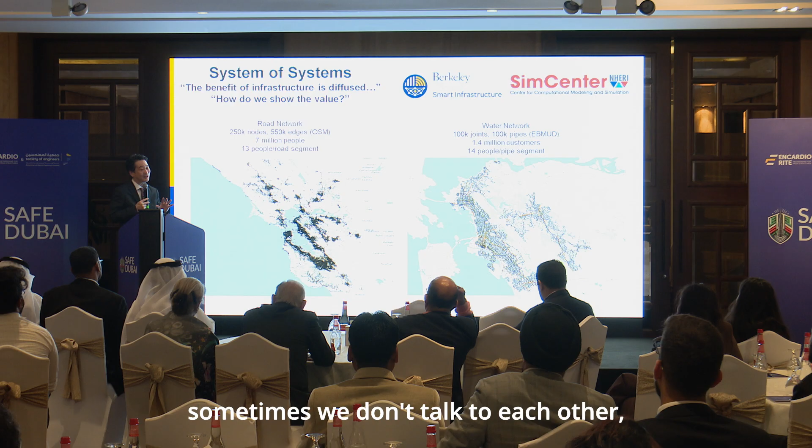As an infrastructure owner, I'm only interested in my system. But then often the other system's failure affects my system. Sometimes we don't talk to each other, and we don't know the consequences for each other. So often the benefit of working on systems of systems is very diffuse, because it's very difficult to simulate that kind of scale. But with high performance computing, we can do that.

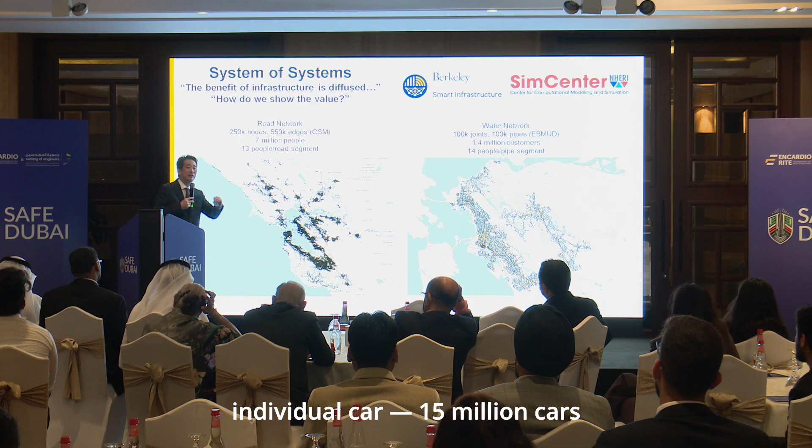For example, in the Bay Area, we have 7 million people. Every day, we have 15 million trips. We sort of know where they start and where they go. They tend to drop their kids and come back home, they go to work and all these things. So we have a census record of how people are moving around. And we can model each individual car, 15 million cars, through computer simulation. And then we can say, okay, let's stop the Bay Bridge because it's fallen down, and what's going to happen to the traffic.

So these are the simulations that we do, the simulation of the entire network, before the Bay Bridge goes down or after the Bay Bridge goes down, and what's going to happen. So with simulation nowadays, you can start to do that from the road level to the regional scale.

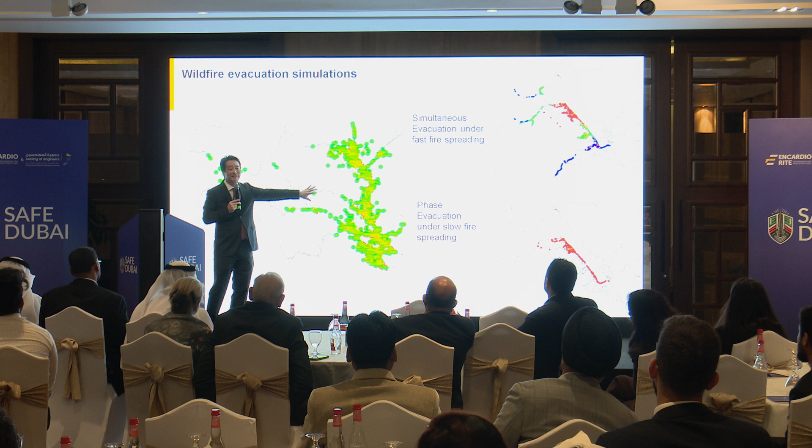In California, we have wildfires. You may have heard about the LA wildfire recently, and we had a lot of issues in evacuation. We can do a simulation of each individual car. So these are the cars moving around. These are agents, we call them. These are background traffic. And then we start to see blue popping up. This is in an area called Point Reyes, where, because there's a fire happening, we see how residents are moving. So we can do these simulations.

It allows us to talk to residents and say, this is you, and you're going to have a blockage over here and there. Now, in this particular site, you have two simulations. One is when the fire goes quickly, everybody has to evacuate. But if the fire is going slowly, we can have what we call a phased evacuation, and it shows the differences. Obviously, you don't know which one is going to happen in reality, but the residents start to understand the complexity of the issue visually.

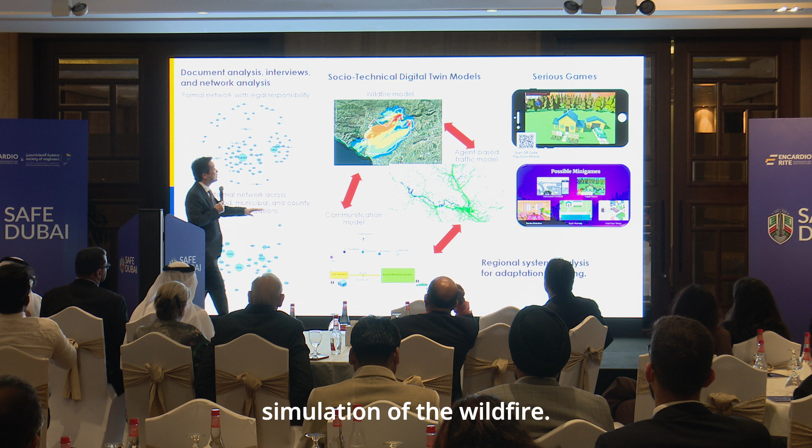So this is where interesting things come in. We do a simulation of the wildfire. We do a simulation of traffic, but we know the most important part is how people communicate with each other. So this is where the social scientists come and tell us the models of how people react to certain messages and how they move, and this becomes a very important part of our digital twin. We have a digital twin of the wildfire, a digital twin of the evacuation, and a digital twin from the social scientists of how people communicate, and that creates what we call a socio-technical digital twin.

ChatGPT is insane now. We have our code running these simulations. Actually, many of the public came and asked, Kenichi, can you do the simulation for my neighborhood? And I said, yeah, but we don't have many researchers. So we created a ChatGPT platform where residents can create an input file, run their own simulations, and the output will be visualized by themselves, and they start to learn about the issues that they have.

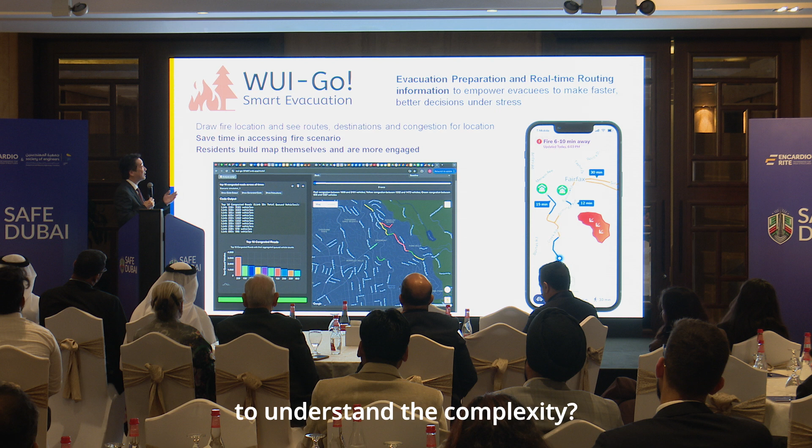It creates its own podcast, a personal podcast. And this is where we're going: how do we make our infrastructure system modeling into a personalized one that the community can use by themselves to understand the complexity. So this is one of the startups that we have, called WUI-Go.

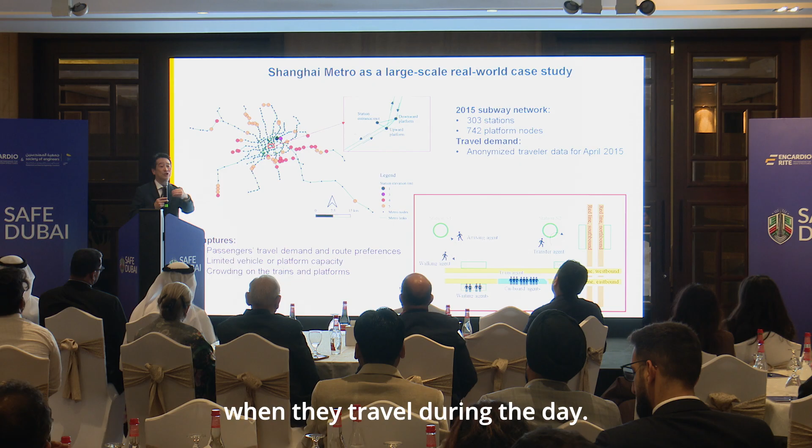I put these slides in because in Dubai I heard that there's a threat of flooding. You have flash floods nowadays. So this is another simulation that we did for the Shanghai metro. They had a problem with flooding in Shanghai. And again, we do a simulation of the network. We model each individual person, because they have a record of when they travel during the day. So we're doing that simulation again, and you can see how people are moving in and out in the simulation.

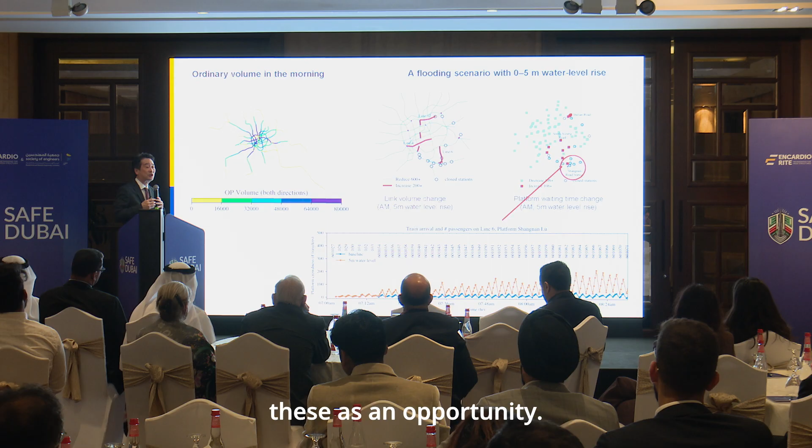And then we can start to see, in ordinary time, which part is very congested or not. But then we can start to see, if a scenario of a 5-meter water level comes out, the stations get flooded, and then it's going to have a disruption, and which parts of the lines will get disrupted, and what the waiting times on the platform are. So you can start to do these simulations. So we start to see these as an opportunity. Of course, this is just a model, but it gives you an understanding of the bottlenecks.

Once this happens, then you have to recover. So this is another one that we're really looking at: how do we recover? And again, say there's an earthquake in San Francisco. There'll be a lot of buildings that will get damaged, but the question is how do we recover to what we call functional recovery? And it may take many, many months to come back.

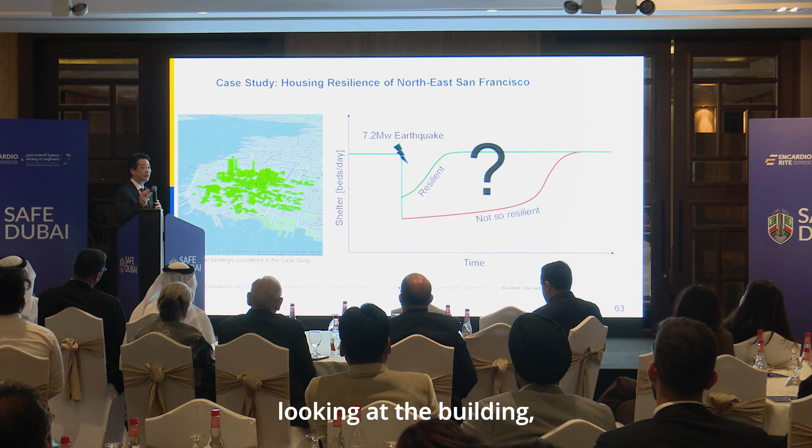And here is the issue. Like I said, just looking at the building: once you get your building, you have to bring a lot of things. You want to make sure that water will be there, transportation will be supplied, supply of jobs, people, right? People coming to fix things, for example. So that's another demand and supply issue. Housing and all these things. So we bring all this together to look at the recovery.

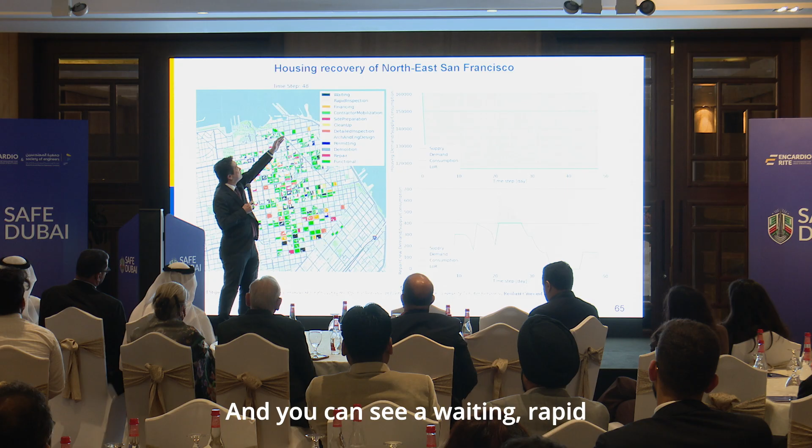So again, this is a simulation saying, okay, when an earthquake happens, which building is going to have large damage? And you can see awaiting rapid inspection, financing, contractor mobilization, site preparation, cleanup, detailed inspection, architecture and engineering design, permitting, demolition, repair, functional. You have to go through all these things, but then there's a supply and demand issue that comes out. And what we do is simulate to see which one will become a bottleneck, so the city of San Francisco will be prepared for the issues that may come up during a big event. So these are things that we engineers can try to do to highlight these issues.

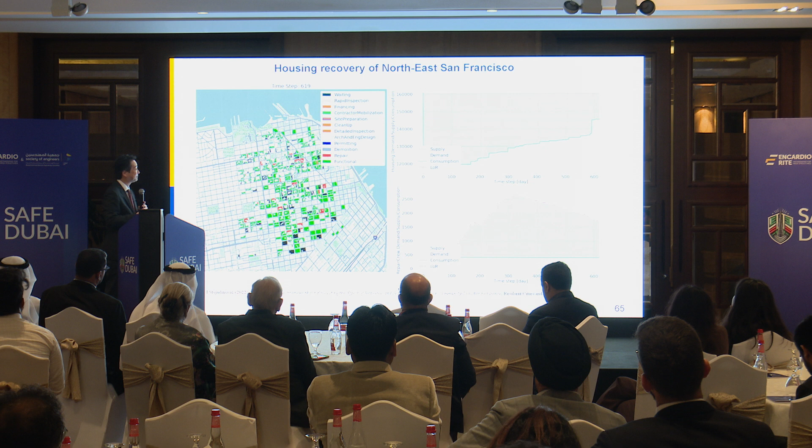And so if you're interested, we have a platform called SimCenter, so please have a look. And this is something where a digital twin is coming.